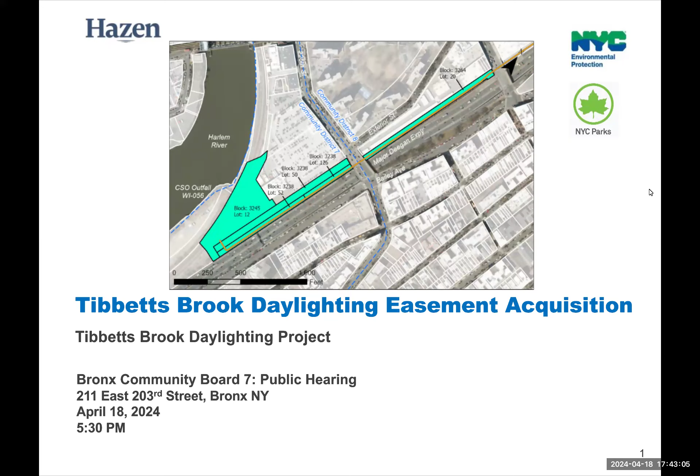Okay. So we'll progress the slides here, but also follow along in the handouts if it's hard to see. I'm Amy Moxney, project manager for the Tibbetts Brook Daylighting Project at the New York City Department of Environmental Protection. I'm here with my colleague, Dana Taplin, who's leading the environmental review on this project, Terrell Epison, also in the audience, and our consultant team to support technical questions, Dahlia Thompson and Christina. So we're a big team. Hopefully we can answer all of your questions.

But we'll give an overview tonight. Just to remind folks, this discussion is on a component of a much larger project. I'm going to give an overview of the Tibbetts Brook Daylighting Project so you have that frame of reference. But tonight's hearing is really about a specific land use action and easement acquisition on a Metro North yard that's part of the project. So we'll hone in on the details of that component as we go through the slides.

Just to give folks an overview of DEP's mission: it's to enrich the environment and protect public health for all New Yorkers by providing high quality drinking water, managing wastewater and stormwater, and reducing air, noise, and hazardous materials pollution. The Tibbetts Brook Daylighting Project and this easement acquisition will ultimately convey base flow from the mill pond in Van Cortlandt Park, plus some wet weather runoff, to the Harlem River. So we're going to be increasing the available capacity of the combined sewer and reducing both the frequency and volume of combined sewer overflows. It's really a water quality improvement project that's going to lead to tremendous benefits for the Harlem River.

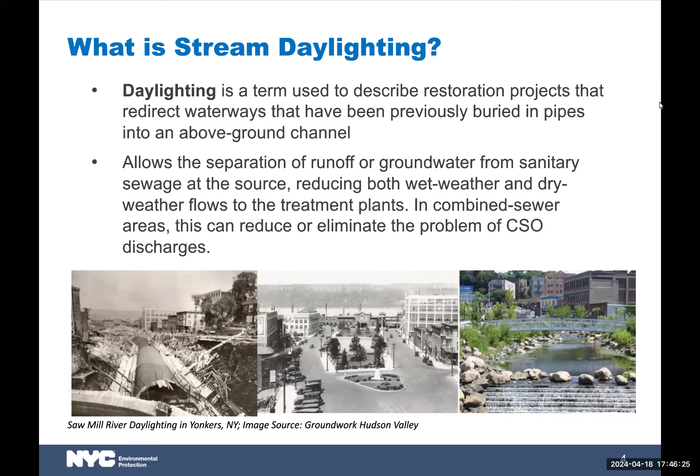But just to give that historical overview, the stream was covered and directed into the sewer in 1912. And the community, maybe many of you in the room, have been part of advocacy that it should be daylighted for decades. This project, as I already noted, is going to improve water quality and make some drainage improvements as well. And just to really narrow in, the Tibbetts Brook daylighting project. Daylighting refers to diverting Tibbetts Brook away from the combined sewer system and into a constructed conduit. So the new conduit's going to allow the brook to flow from a new weir that'll be constructed in Van Cortlandt Park. And then eventually this connection will be restored to the Harlem River.

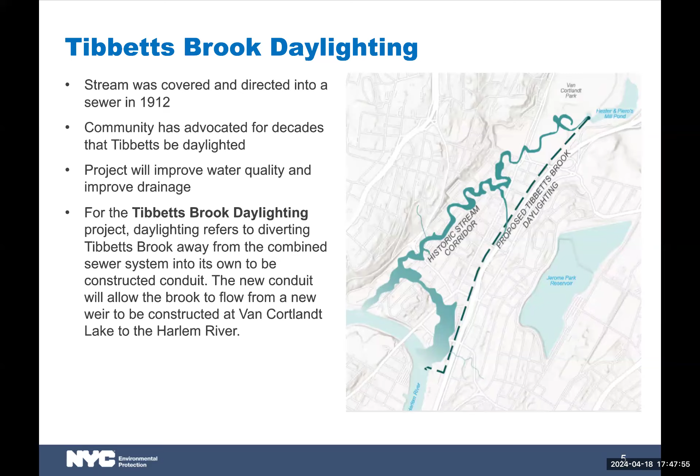Kind of reiterating our goals, and I'll go through these quickly, but restoring that hydraulic connection is one of the main project goals. The other is to reduce combined sewer overflow. So when all is said and done, we are anticipating a 215 to 220 million gallon per year reduction of combined sewer overflow. This is a project that's under a consent order that New York City DEP has with the state. It's under our long-term control plan for the citywide open waters.

Oops. Okay. You can go back.

Okay. Just a couple of other points on that last slide. The project is in partnership with the Parks Department, so they are a funding partner on this project. They are going to be working with us to extend the Putnam Trail that exists in Van Cortlandt Park all the way to West 230th Street. So we're going to be connecting our new trail to the existing bicycle network and really creating this extension of the greenway that will have this other public benefit. So park and water infrastructure combined, it's truly an integrated project. A lot of attention is being paid to the enhancement of wetland habitat in Van Cortlandt Park, but also throughout the more urban CSX.

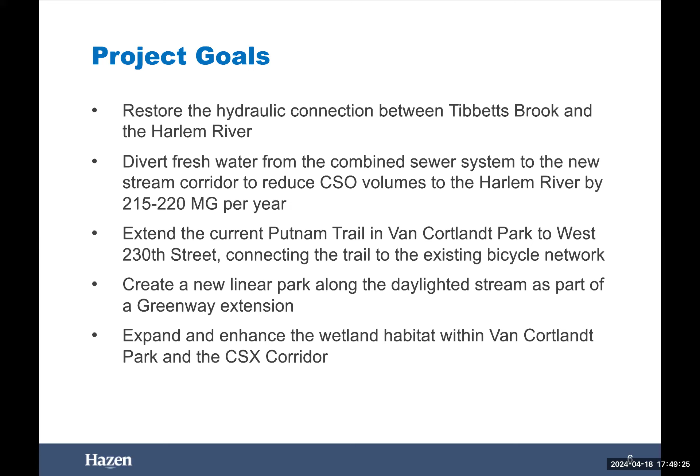The central segment runs along the former railroad line that was owned, or is currently owned, by CSX, but the city is purchasing the property. We have an agreement in place to purchase this property and hopefully close in the coming months. But in that section, we are limited in space, so it's a lot narrower. It's adjacent to the Major Deegan. There are a lot of project constraints, but we're still bringing this water infrastructure through and also creating the greenway.

The third and final stretch is the southern reach, which extends from about West 230th to the outfall that you can see on the map at the Harlem River. And this is the portion of the project that will be in a closed conduit or an underground pipe. And this is the section that's running through the Metro North Rail Yard that we are seeking this land use action for an easement. Just so folks are aware, there was a prior ULURP completed in 2011. This was to establish parkland within the CSX right-of-way. So this piece of the project has already been completed and we're building on that through this project.

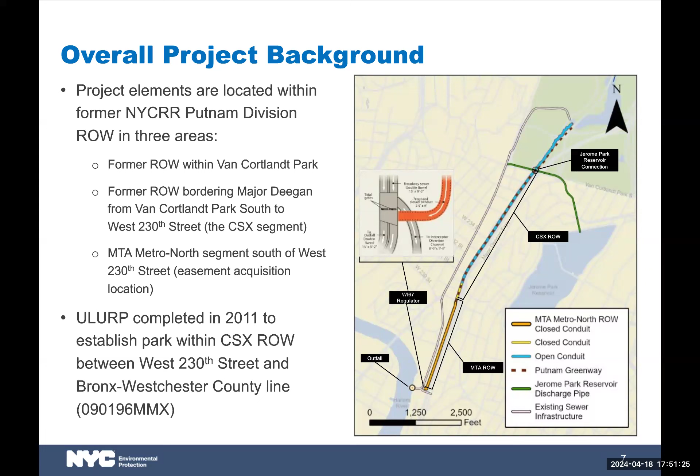Just a couple of engineering or infrastructural highlights to give you a sense of the engineering that's involved. There's a couple of modifications within Van Cortlandt Park to an existing weir structure in the lake. We'll also be creating a new weir called the side weir, and this is what's going to facilitate flow into the open channel.

The second piece is the conveyance channel as an open daylighting condition, and that extends to West 232nd Street. And then the closed conduit, as I noted in the previous slide, the greenway will be extended to 230th Street. So it does extend a little bit beyond where the open channel exists.

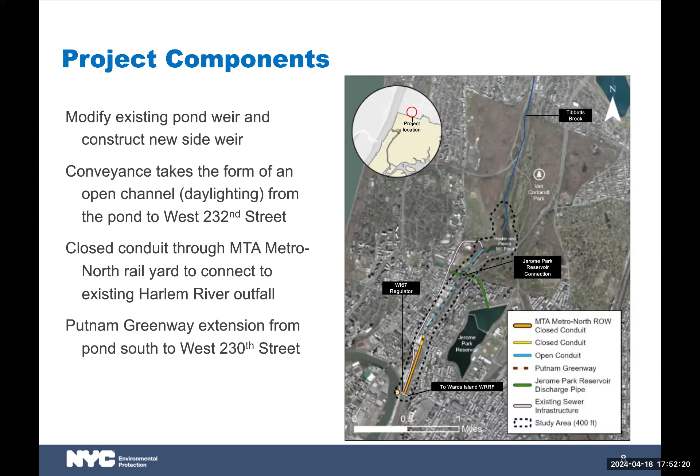And just to highlight that this project has been in development for many years, but throughout the process, we have been working with a lot of the community stakeholders involved to really enhance and develop this design. So we've established the Tibbetts Advisory Group, which is members from, I think, both community boards, but a lot of other organizations in the area that have been historic advocates of this project.

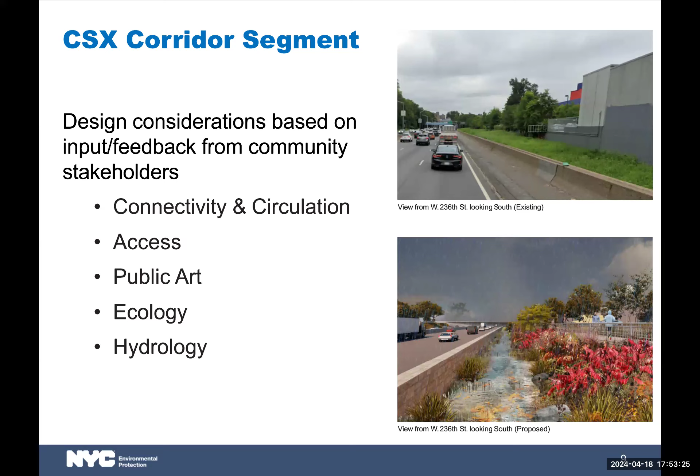And we are working with them as well as our agency partners to ensure that this project is addressing connectivity and circulation issues, providing access to open space in the new park. Public art will be a component of the project, enhancing ecology, and then obviously this very large component of hydrological influence that we're considering. These renderings just show a condition before and proposed in the CSX corridor, just to give a sense of what that looks like.

And now I'm going to pass it over to Dana, who's going to go into the land use action details, and really we're going to talk specifically about that southern reach of the project. Okay, thank you, Amy.

And then down here, it takes a turn and it feeds into existing infrastructure. And it is upstream of this outfall. This is an existing outfall. The existing is the combined sewer that in wet weather, at certain times, the combined sewer sends its load, the flow to the Ward's Island wastewater treatment plant through this regulator.

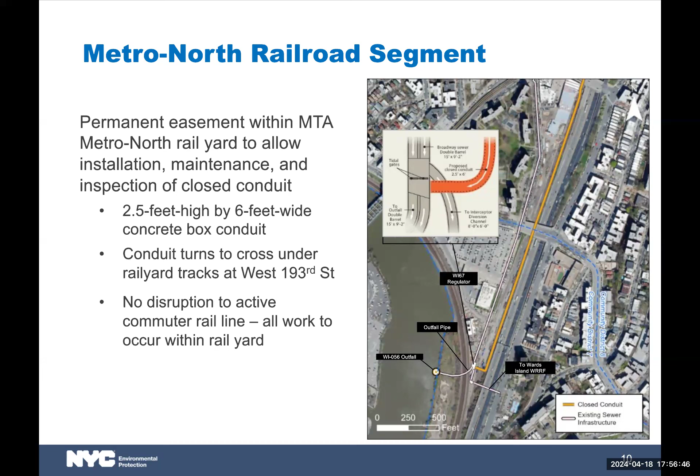And right, so the conduit will convey the stream base flow and limited wet weather flow. So right now, Tibbetts Brook exists. It rises in Yonkers somewhere. There's Tibbetts Brook Park. It flows down through Yonkers and into the Bronx, through Van Cortlandt Park, and into what used to be called Van Cortlandt Lake, and now it's called Hester Creek Mill Pond. And from there, it goes into the Broadway sewer.

And so this is going to take most of the regular dry weather flow, all of the dry weather flow, into this new channel, and some wet weather flow.

When it's very heavy rain, the existing infrastructure that discharges into the combined sewer will still be operating, but a lot of the flow will be taken into this diversion. So as Amy said, it restores the hydraulic connection between Tibbetts Brook and the Harlem River. The conduit ties into the outfall pipe downstream of the regulator.

The regulator is the thing that regulates the flow, so that when the flow in heavy weather exceeds the capacity of the sewage treatment plant, it tips the rest of it into the river. And that's what we're trying to reduce through this consent order. And the closed connection to the outfall is engineered to prevent combined flows from backflowing during storms. So it's that, and the next slide.

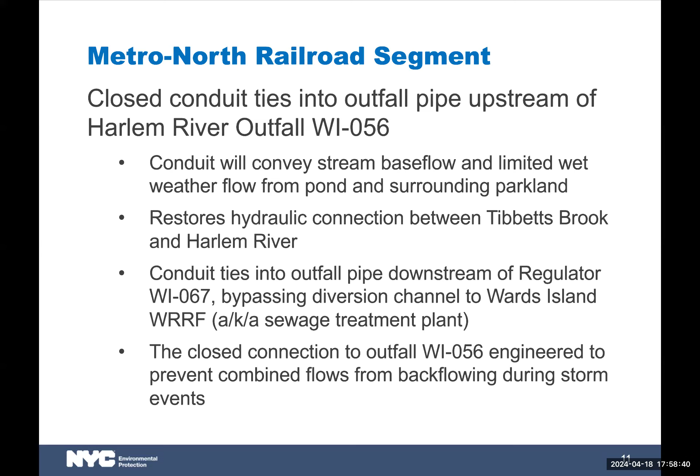Right, so the easement acquisition involves 5 tax lots. Not all of the Metro North rail yard property, but a lot. And as it says here, block 3264, lot 20, which is in Community District 8, and the other 4 are in District 7: lots 50, 52, and 126 in block 3238, and lot 12 in block 3245. And the zoning is this. The construction is anticipated beginning in late 2025, late next year.

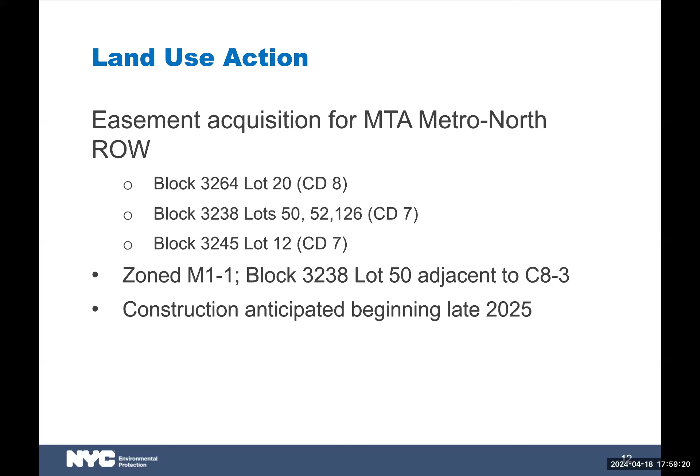Next slide. This depicts the tax lots. In the CSX segment, the city is acquiring the whole thing outright. In this part, we are acquiring an easement, which allows us to install a pipe and to maintain the pipe over time. So we're obviously not trying to acquire all this land from Metro North. It's an easement across it. The exact boundaries are yet to be defined. Is that correct? So the easement is just through these tax lots. So this one is in Community District 8, and these ones are in District 7.

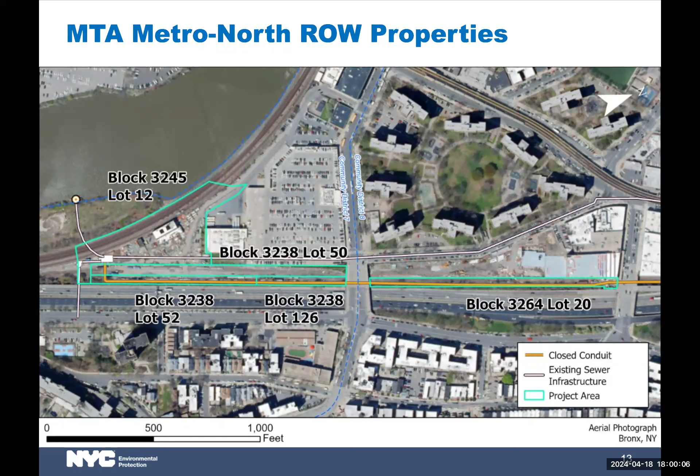And this is some of the dates. We did present to the Parks and Recreation Committee almost a year ago the basic idea of the project. The environmental assessment statement on the entire project was completed by DEP as lead agency, with the able assistance of our consultant team, in January, and a negative declaration was issued February 12th. ULURP was certified, the application was certified on the 20th. And now the community boards have it towards the end of this month.

Then borough president, city planning commission, then it can go to the city council and you could get mayoral review. We're not anticipating that. Assuming those stages don't happen, ULURP should be completed sometime in July, which just means that the city has agreed that this is a good thing to do, and then all the details have to be worked out with the owner, which is the Metropolitan Transportation Authority.

Yeah, and I think this is just the summary of all the stakeholder engagement to date. So just noting that we've been meeting with the community since 2021 to discuss details on the project and on design milestones, keeping folks in the loop along the way and even offering opportunities for feedback. We've also done a few site visits. So a lot of engagement with the community, and we'll continue to do that through the duration of the project.

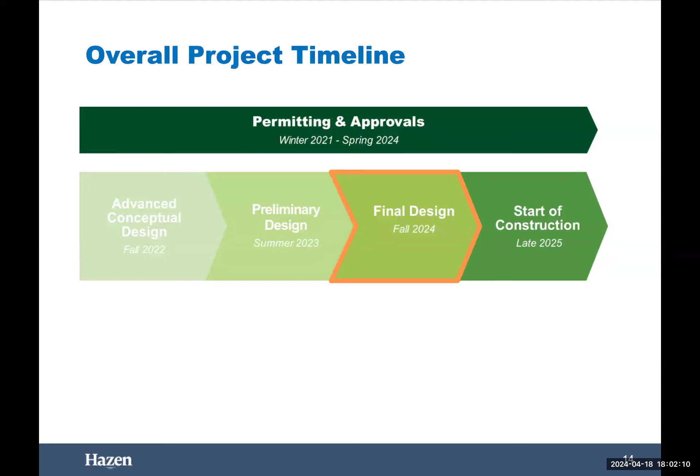And this is just a quick snapshot of our general project schedule. As Dana already mentioned, construction beginning in late 2025. Right now, we're finalizing our design and anticipate that to happen this fall. And that's all we have. Thank you.

Do we have any questions? James and Sarah, I see your hand, okay? My question is, so you say this is starting within Van Cortlandt Park, or from Yonkers to Tibbetts coming down? No. The existing brook. Right, existing. Oh, yeah. In the section that's going through Van Cortlandt Park, are there going to be crossovers for pedestrians? Yeah, there's two bridges that we're proposing for the project, and we're going through PDC review right now, so they're aware of the connections. Circulation and connectivity has been huge.

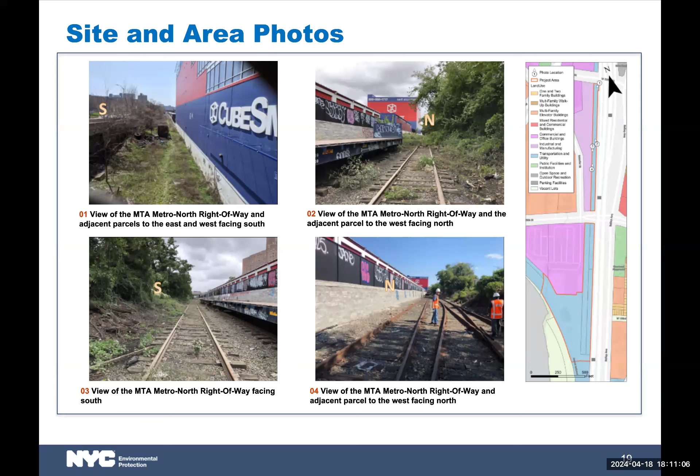And with the improvements we're doing in the corridor, we're building a wall that should help by providing some protection. It's not gonna be that high. We don't want people to feel like they're in a tunnel, right? So we're adding a bit of height, that barrier between the corridor and the Deegan. So we think there'll be some improvements, but it's not gonna solve it. Right, so that was gonna be my next question.

So when the water overflows in the new causeway that you're creating, will it go into the Deegan? Yeah, so not in the ideal world. Where it currently might overtop onto the Deegan, that situation would still happen. But we anticipate that it is going to happen a lot less than it does right now. Like I said, we don't have enough space to convey everything, and also we're limited, there's people's buildings on the other side. Right.

So we can't just flood that corridor. It goes through the path, so. And because we have this shared use with the greenway, we're not building a stream channel the whole way. We're trying to balance both needs and have space for plantings, for trees, provide some shade for people. So we're trying to balance multiple uses.

And also the lake upstream has certain limitations, but we do have a control on the flow coming from the lake. So at least during smaller storms, we're limiting the amount of flow that comes in. So in a medium-sized storm, we're not gonna get that much more flow than in a small storm into the stream corridor, because we don't really have that space available. But in those extreme events where it currently overtops, we're not changing that condition. Okay.

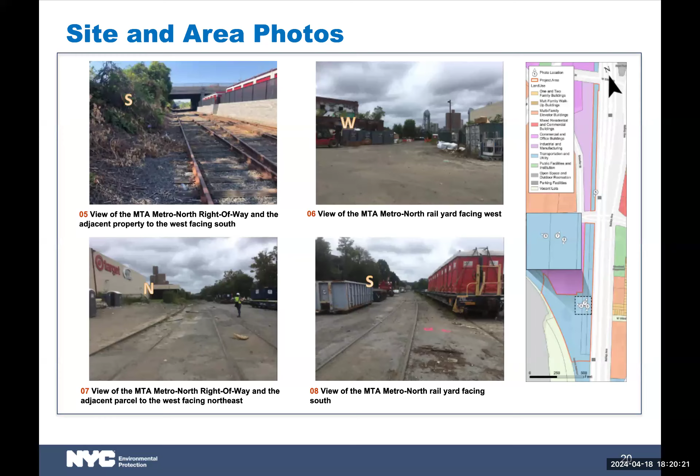Anybody else? Okay, then I need a motion to close the public hearing. Motion to close. Such a good question. And are you guys looking for a letter of support from us? Yes, for our executive. That will happen at the executive meeting next week. Okay, thank you very much for the presentation.